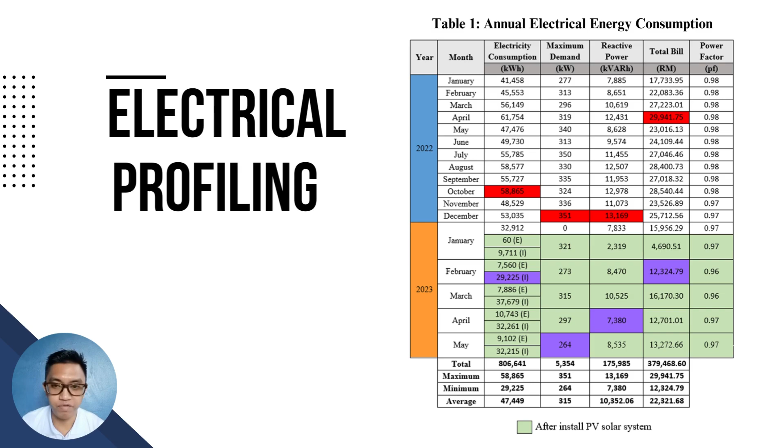Figure 3 and Figure 4 illustrate the annual electricity consumption for 2022 and 2023 respectively. Similar to the cost trend, there is a noticeable reduction from December 2022 until May 2023 as shown in the column chart. Figure 5 and Figure 6 provide graphical representation of both annual electricity costs and consumption for 2022 and 2023.

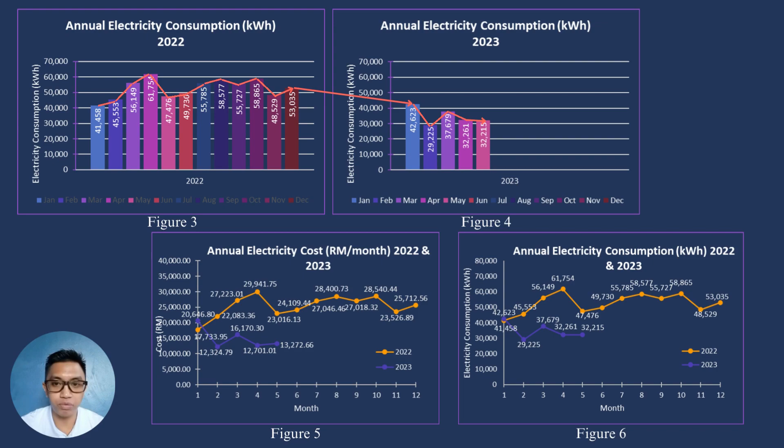Table 2 demonstrates the total savings achieved after installing the PV solar system. It also showcases the total energy consumption charged by TNB and the total energy consumption produced by the solar system.

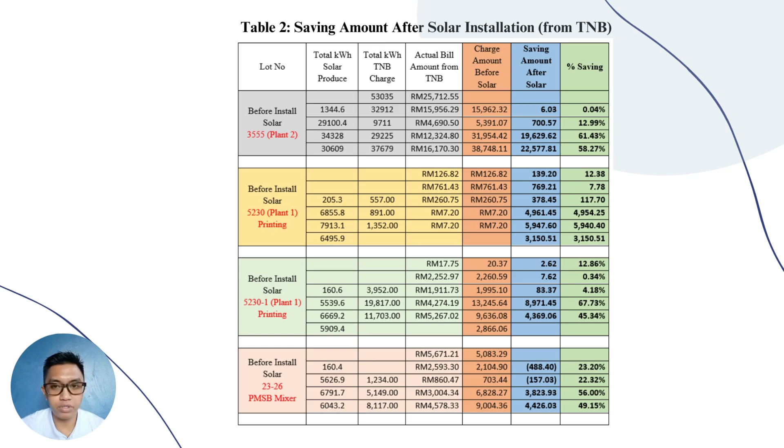Assalamualaikum, my name is Anisha Zwani binti Adnan. Today I'm going to present about power consumption data. Tayopack has 20 areas such as production area, production office, office cubicle, MD room, kitchen, pantry room, storeroom and so on. So we can see that the production area has a higher usage per month.

It is because the production area has appliances such as machines and high usage every day. So the lowest is the storeroom.

It is because no maximum usage per day, and we can see that the total power consumption data is 59,438.9497 kWh per month.

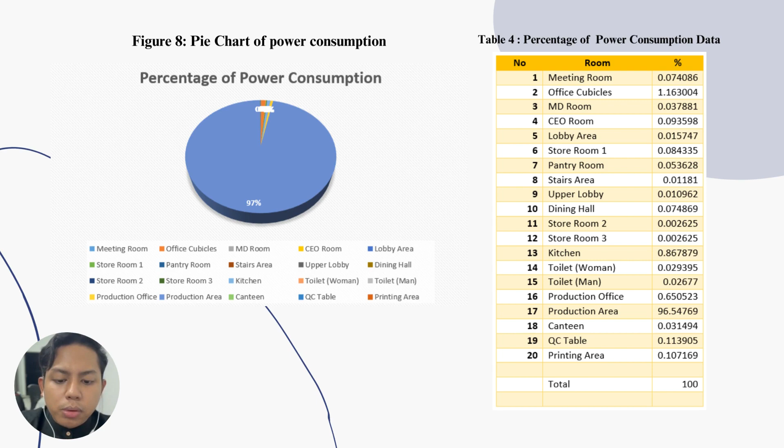The comparison between average and estimated power consumption: average power consumption is 52,719.833 kWh per month, and the estimated power consumption is 59,438.9497 kWh per month. The difference is 12.7%.

Estimated power consumption is higher than the average power consumption because of a few factors. The first one is changes in production processes. The second one is equipment idle time. The third one is energy saving measures and optimization. The fourth one is energy management initiative, and the last one is overestimation of equipment power ratings.

So I'm going to explain the room data survey for temperature and humidity. From the standard, a room temperature needs to achieve a specific range, which is 24 until 26 degrees Celsius, while humidity needs to be in the range of 50 until 70% RH.

As you can see from the chart, 88% of the rooms in Tayopack have temperatures that exceed 28 degrees Celsius, while only 12% of rooms in Tayopack achieve the range within the standard. This may be affected by surrounding temperature, which could be one reason for room temperatures exceeding the required standard.

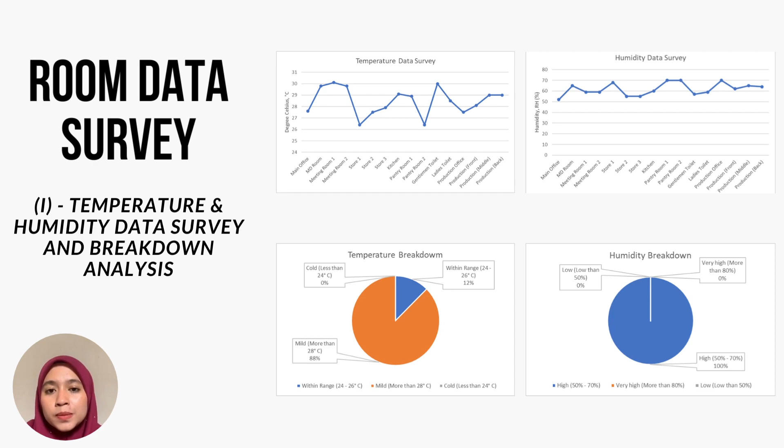For humidity, 100% of every room in Tayopack achieves the range within the MS 1525 standard.

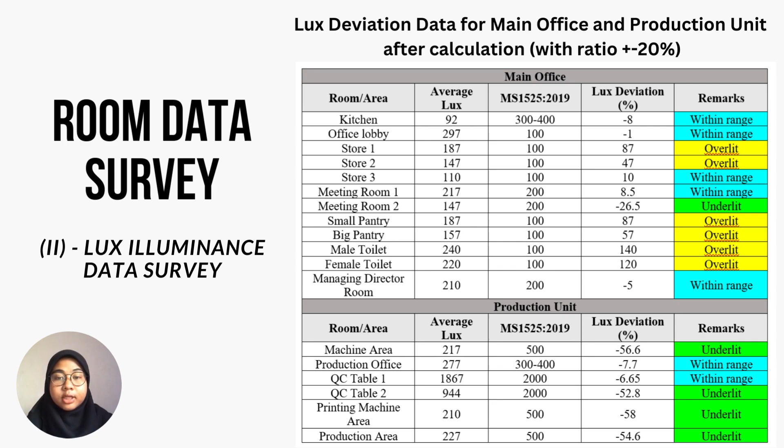The table shows the lux deviation with a plus minus ratio of 20% for main office and production. This is the analysis from the lux deviation data. For the main office, the use of lighting is higher for overlit compared to within range and underlit, but for the production unit, underlit is higher. However, the breakdown shows that the use of lighting within range generates a higher percentage.

For the load apportioning and energy breakdown, we have categorized all the systems by referring to power consumption data that has been collected and calculated. From all 13 systems, the printing machine consumes the most energy, which is 60.137% of all consumption at the factory. This is because the printing machine is used for the main production in the factory.

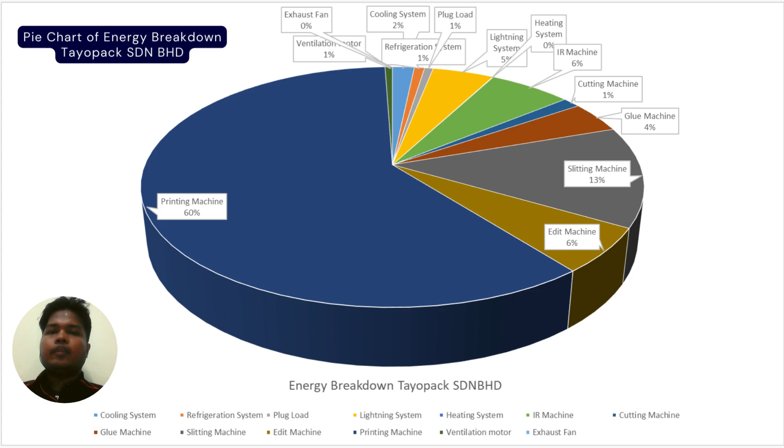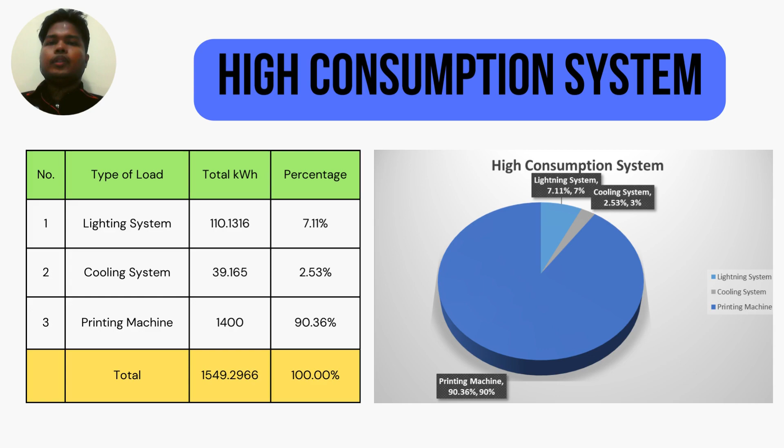This is the table and pie chart for the high consumption systems extracted from the earlier table. The top 3 energy consumption systems are the printing machine, lighting system, and cooling system.

Now I'll be explaining the factors related to building energy index, which is BEI. The table shows baseline data for a year which includes power consumption with total production.

Calculating regression before building energy index helps in understanding the relationship between energy consumption and relevant factors, predicting energy needs, benchmarking performance, and ensuring compliance with energy efficiency standards. It provides valuable insights for effective energy management, conservation efforts, and decision making in the context of building energy usage.

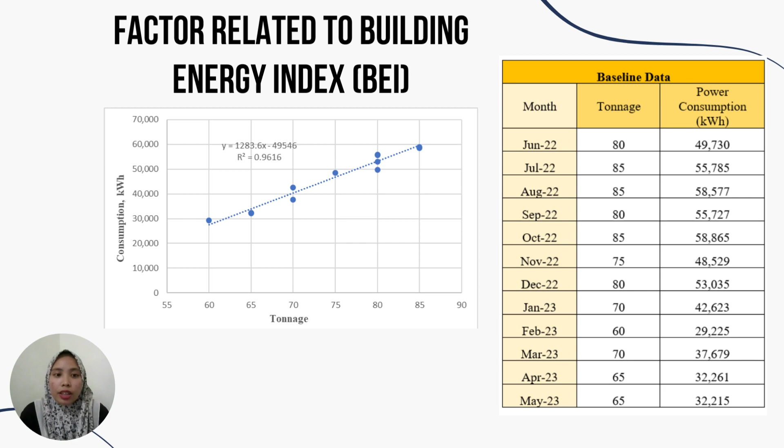The R squared shown in the graph measures how well the regression model fits the observed data. As you can see here, the R squared we achieved for this data is 0.9616, which is higher than 0.75, indicating that the variance in the dependent variable can be explained by the independent variables. So the data can be used.

After completing the regression model, we can now calculate the building energy index. The building energy index that we have achieved is 615.83 kWh per year per ton.

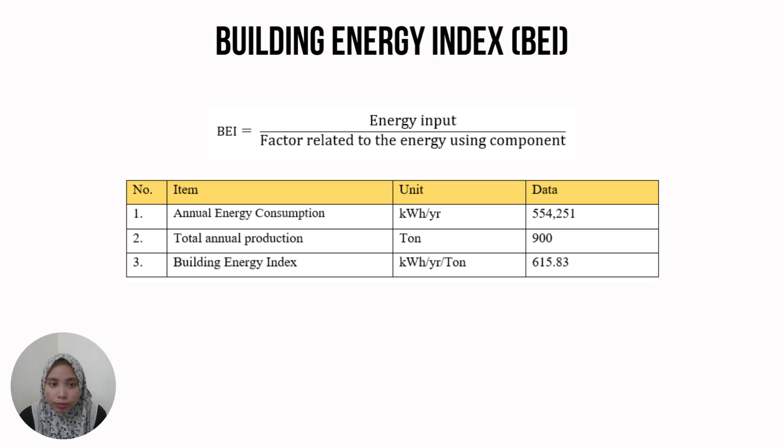I'm going to explain ESM1. We would suggest regularly cleaning the aircon filter. From power consumption data, we know that usage per day is 39.157 kilowatt hour. So for usage per month, we get 939.768 kilowatt hour. So we estimate a 10% energy saving. Per year, we will get 1,127.72 kilowatt hour per year.

From that, for annual energy consumption in kilowatt hour per month, we will get 939.768 kilowatt hour per month. For the annual energy cost, calculated using tariff D, we will get 402.24 ringgit per month. For annual energy cost per year, we will get a total of 4,826.88 ringgit per year. From that, we have compared the estimated and annual energy consumption and cost.

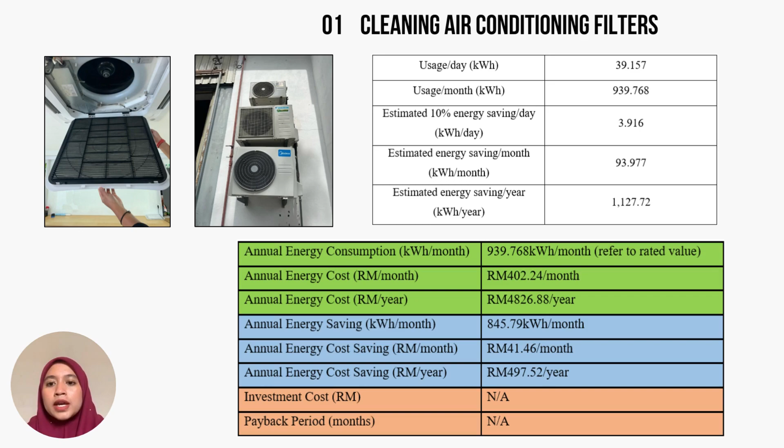Comparing estimated and annual, the annual energy saving is a total of 845.79 kilowatt hour per month. From that, we calculated the energy cost saving we will save per month is RM41.46 per month. So in total for a year, we will save energy cost totaling 497.52 ringgit per year.

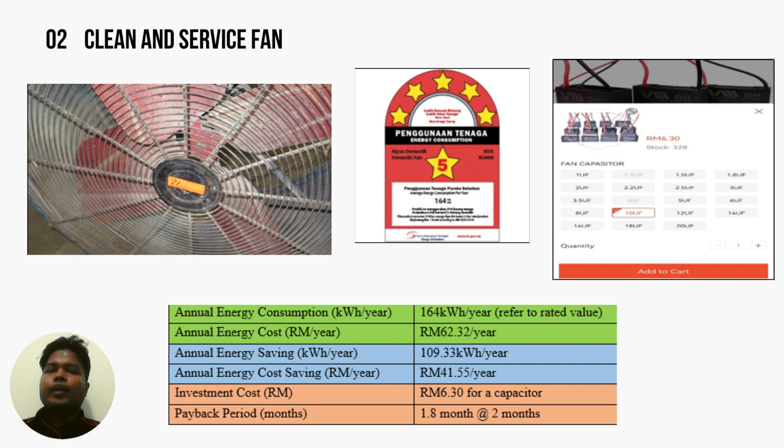The second energy saving measure is to clean and service the fan or replace if required. This calculation assumes the fan speed is running at one third of the maximum rating, using fan regulator number 1 instead of 3. This fan consumes 164 kWh per year and will cost RM62.32 per year. By cleaning or changing the capacitor of the fan, it will reduce energy consumption and save up to 109.33 kWh per year and save RM41.55 per year. If the capacitor is changed, 1 unit capacitor will cost RM6.30 and the payback period for the investment is 2 months.

The next ESM for medium cost measures is replacing the old bay lights. At Tayopack, there are 20 units of old bay lights that still use 250 watts. The yearly usage of these old bay lights is 7,800 kilowatt hour. After the ECM, we would change the wattage of the high bay lights to 150 watts. So the yearly usage will decrease to 4,680 kilowatt hour. The annual energy saving will be 3,120 kilowatt hour per year, and we can save about 1,375.92 ringgit. The investment cost for this project would be 2,700 ringgit, and the payback period would be 2 years.

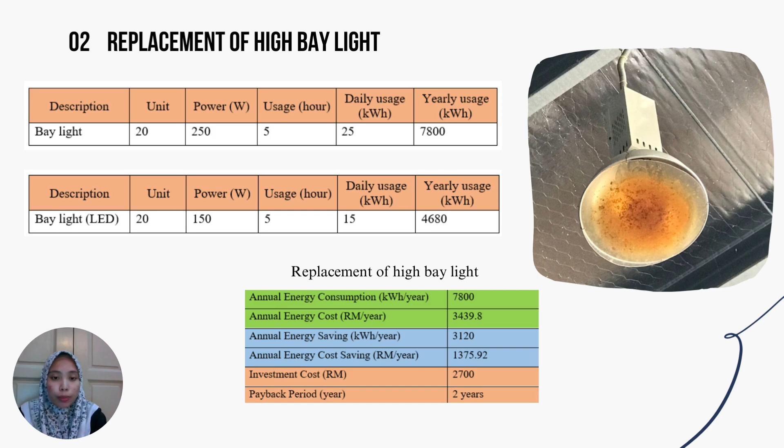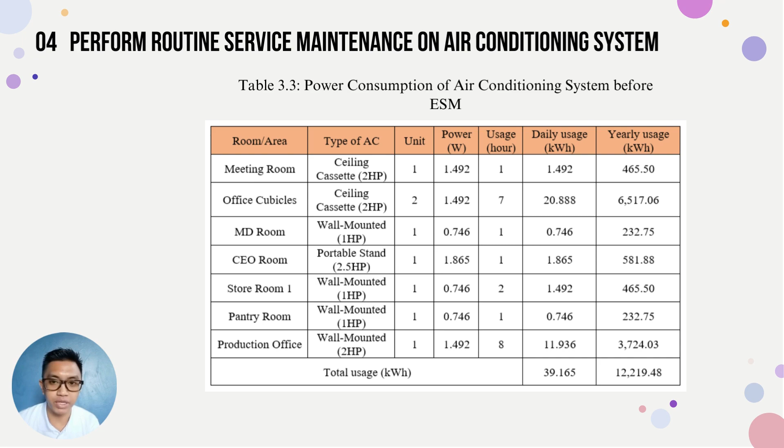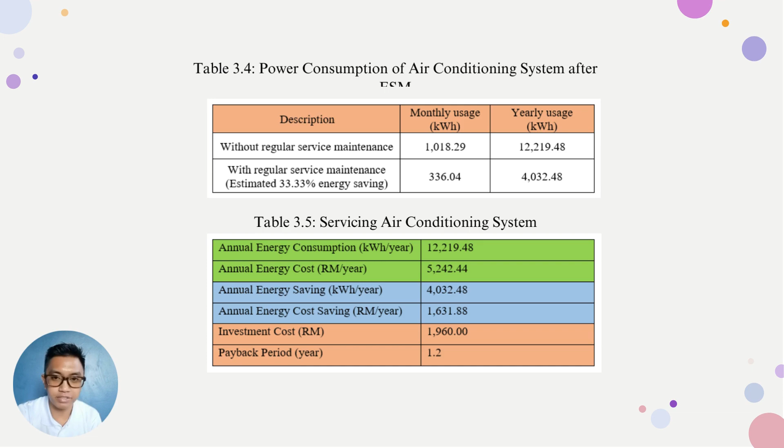The energy saving measure for high cost is to rebuild the exhaust fan at every machine in production. This is the list of appliances: IR machine, cutting machine, glue machine, slitting machine, edit machine and printing machine. The total usage before we apply the ESM is 613,872 kilowatt hour per year, and after we apply the ESM is 552,484.8 kilowatt hour per year.

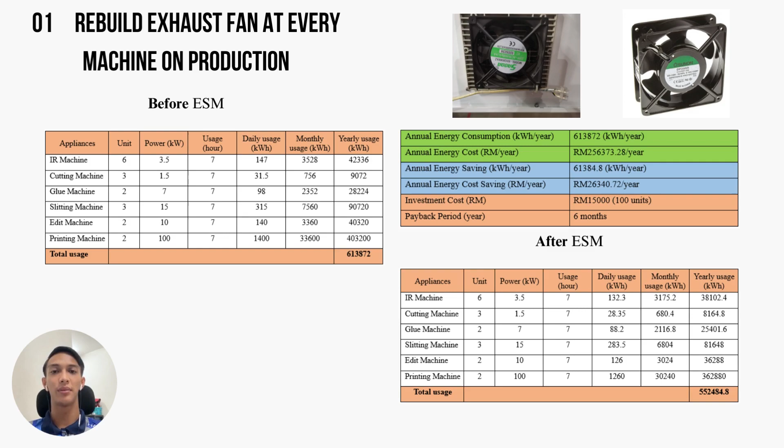The annual energy cost is 256,373.28 ringgit Malaysia per year, the annual energy cost saving is 26,340.72 ringgit Malaysia per year, the total investment cost is 15,000 ringgit Malaysia, and the payback period is 6 months.

An energy audit begins with a comprehensive analysis of the building's energy consumption. During the audit, we evaluate the efficiency of critical systems like HVAC, lighting, and controls. We compare audited equipment with energy efficient alternatives to uncover potential energy saving opportunities. The conclusion of the energy audit provides valuable insight into how energy is being used within the building. It highlights major energy consuming areas and offers targeted recommendations for improvements.

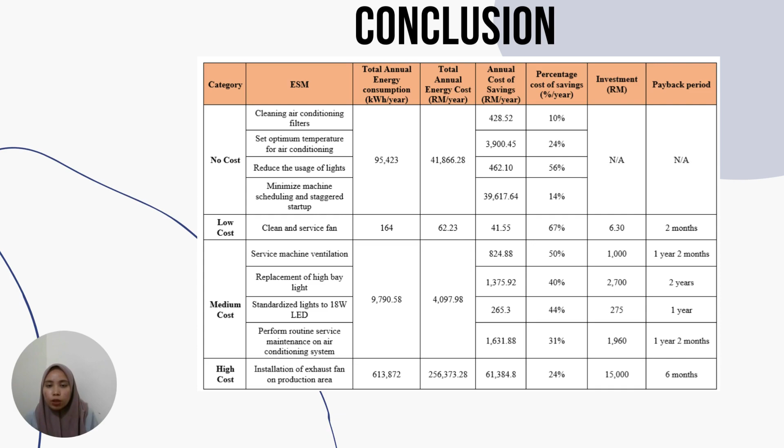The table in the slide shows recommendations that may include retrofitting or upgrading the equipment. We can also adopt energy efficient technologies, optimize control systems, and modify operational practices. In conclusion, an energy audit offers valuable insights, cost saving opportunities, and environmental benefits. It is a crucial step towards optimizing energy performance, reducing costs, and promoting sustainability.